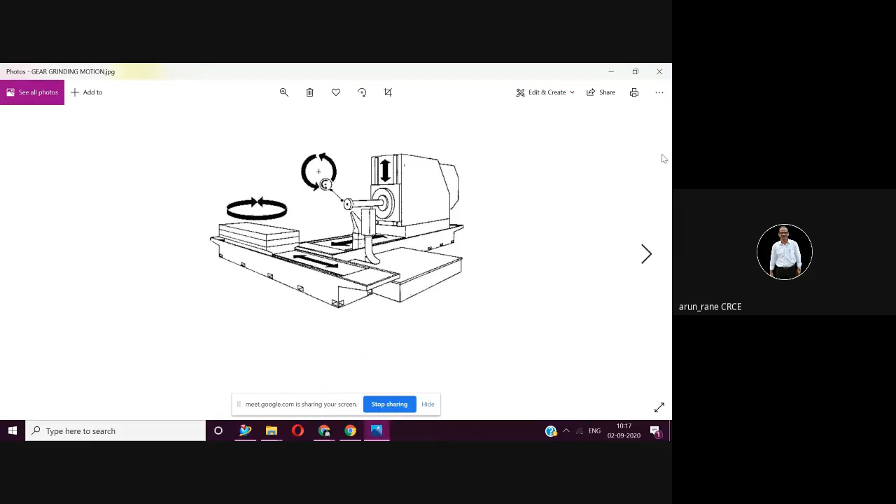This is how gear teeth grinding is done. That is, your grinding wheel is shaped. Grinding wheel is given shape as per the teeth, and the gear teeth are finished.

This is what you can see. This is what is your grinding wheel is, and these are the teeth. Remember, this gear teeth grinding process is used only for finishing and not for teeth manufacturing. So the teeth are manufactured, then as I showed you yesterday, it goes for the hardening, that is heat treatment process, and then they are finished with the help of the grinding.

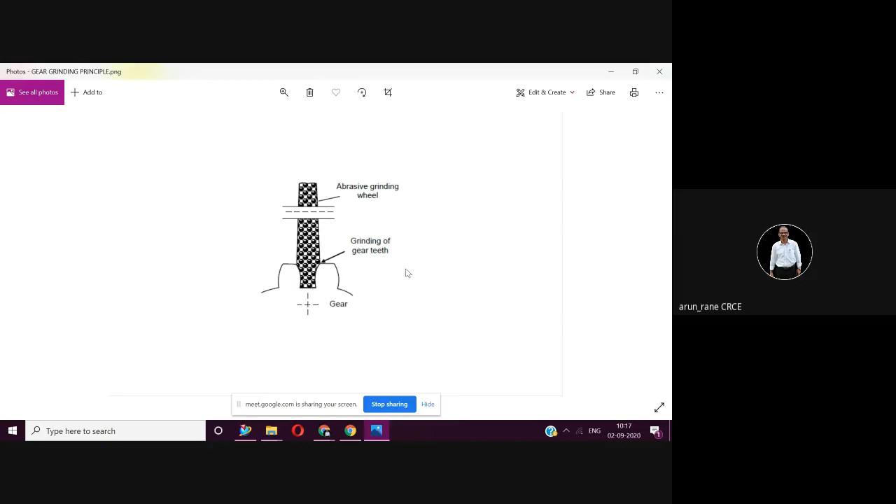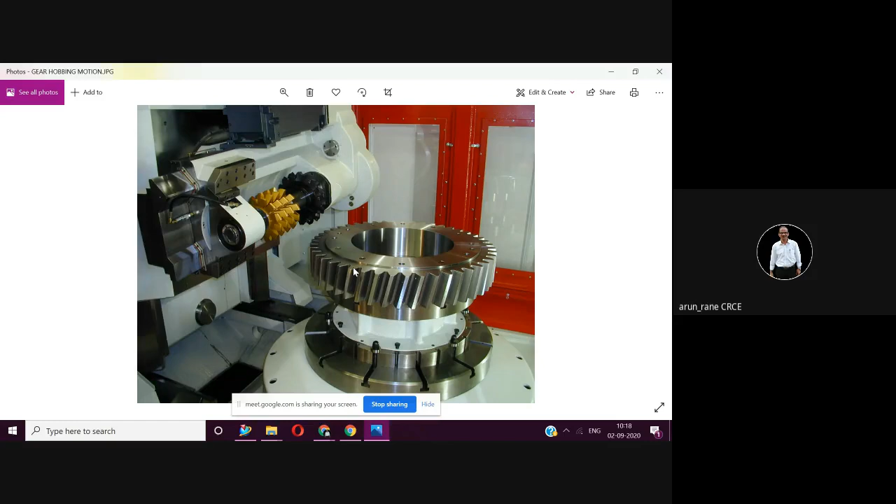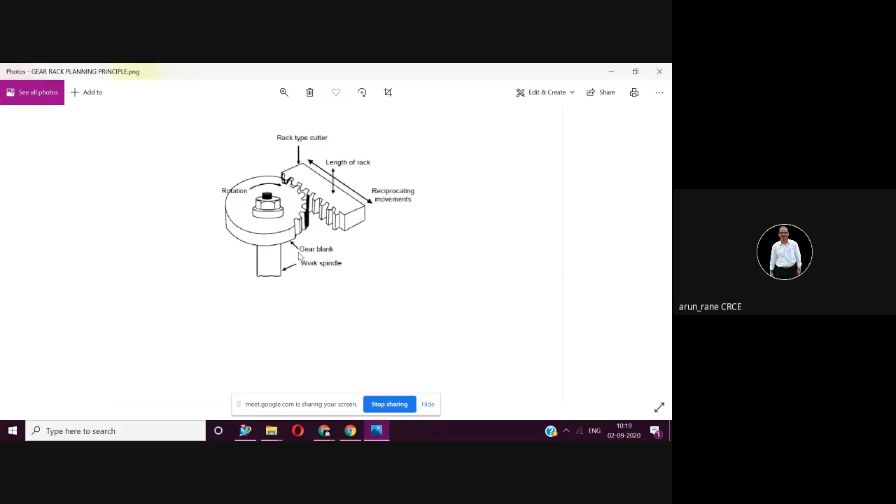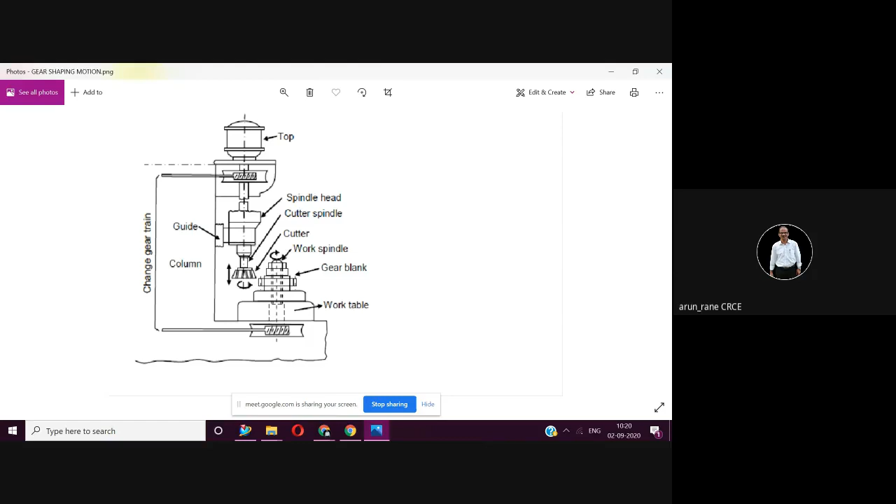Then you can draw one more sketch other than the previous one. This is a gear blank. Now this particular diagram shows the different mechanisms. So you have a gear blank here. Then this is your shaping cutter, which is moving up and down. Then it also rotates. So the gear shaping cutter is rotating, and the feed is given in this direction.

So this is your rotary feed, and this is your radial feed. This radial feed is also called the axial feed, but radial feed is more appropriate because it is penetrating. The depth of cut is given along the radius.

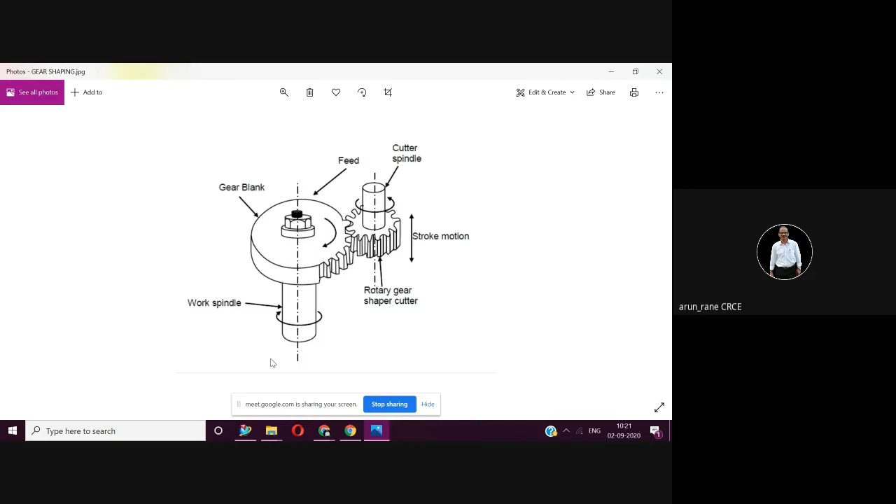Hello, sir. Hello, sir. Hello, sir. So gear comes under the category of... hello sir... multi-point cutting tool. Multi-point cutting tool.

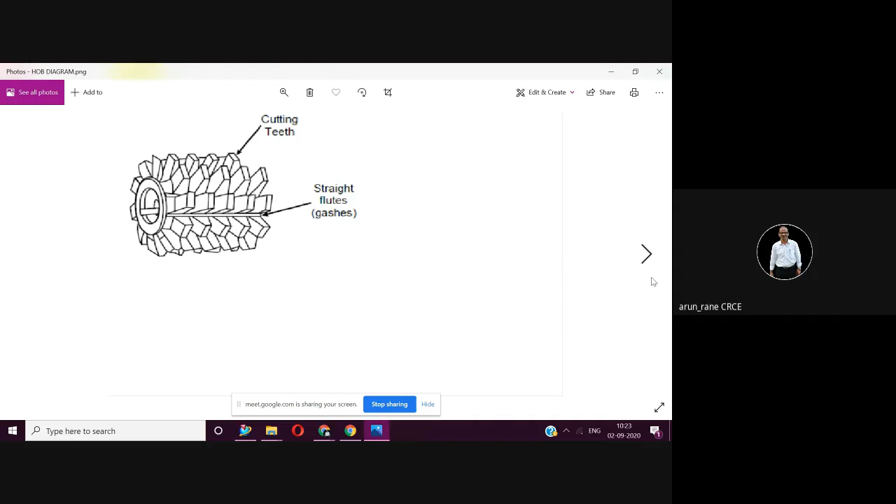Hello sir, Siddhant wants to join the meeting. Please add him. Who join now, Siddhant? Tell you join, no? Yes sir, he is in. At the end, write your attendance in the chat box. Sahil, alright sir. Yeah, I'll continue.

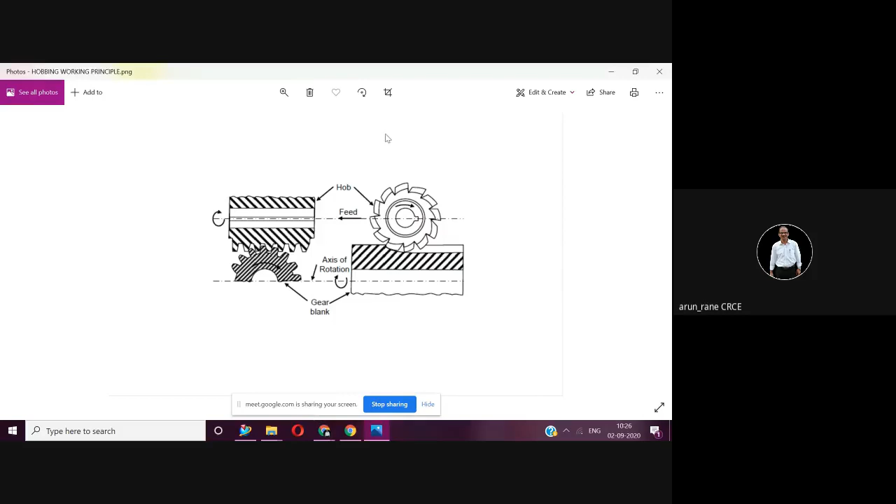Again, this is not important from your examination point of view. We will discuss honing, but that honing process will be for finishing the bore, for finishing the holes. So honing as applied for teeth finishing is not important from examination point of view. You just have to remember the different teeth finishing processes: gear teeth honing, gear teeth lapping, gear teeth grinding, and gear teeth shaving, out of which gear teeth shaving is there in the syllabus.

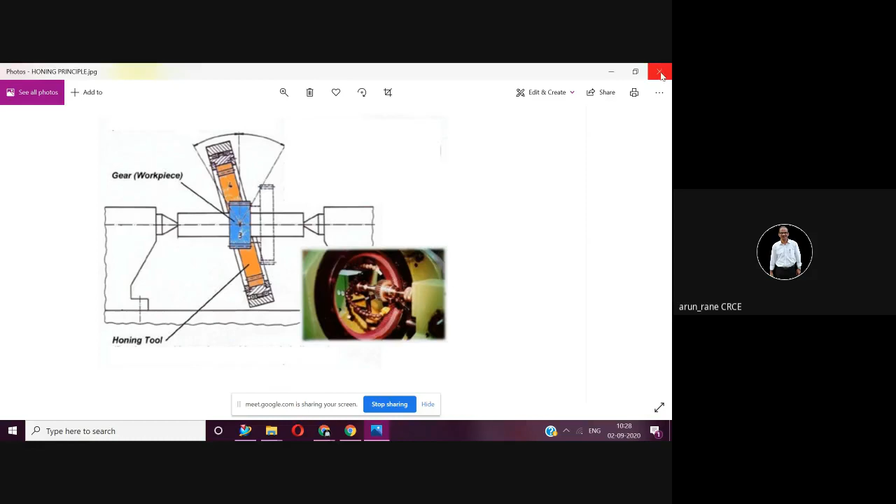Anybody want to ask any doubts? Yes.

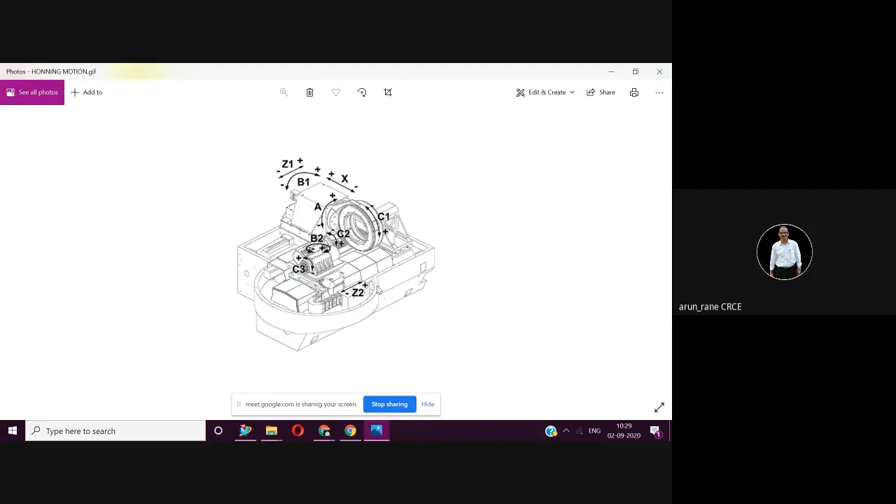But remember, gear teeth grinding, gear teeth honing, gear teeth lapping - these three processes are becoming obsolete, or rather I will say these processes are obsolete, because these are very expensive and time consuming also.

Then how to finish the gear teeth? With a process called shaving, gear teeth shaving. Gear teeth shaving process is used for finishing the gear teeth, which is more economical and faster also. In gear teeth shaving, you have a master gear which is fed against the gear which is to be finished. In just two or three rotations, the teeth are finished. So it is very fast and economical also.

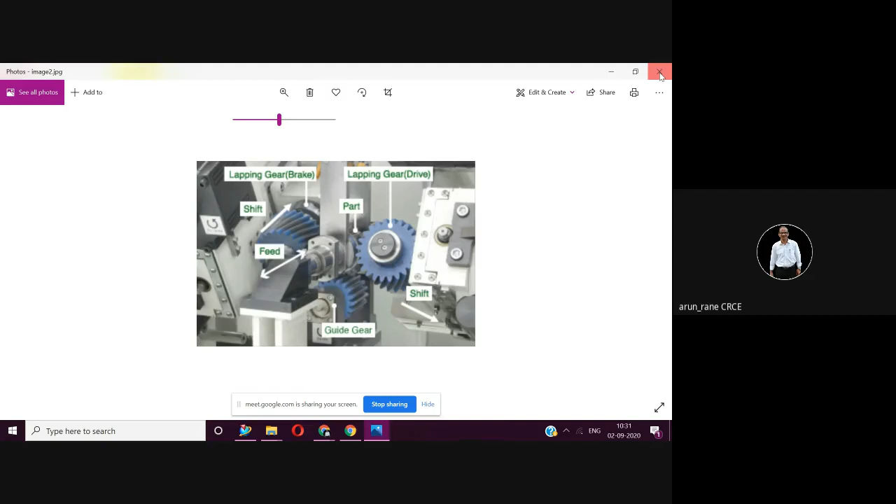Now just look at this carefully and try to identify which kind of gears are these.

So can anybody tell me what kind of gears are these? Can anybody tell me? Helix? Sorry, Sahil. Bevel? Helical type, helical gear, sir?

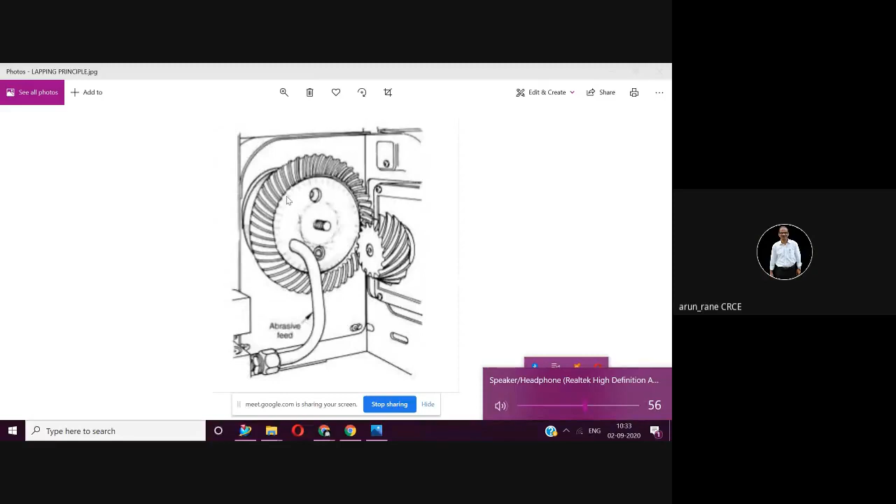This looks like a helical gear, but it is not a helical gear. This is actually like a bevel gear, but it is again not a bevel gear. In bevel gear, the teeth are cut straight. But if you notice, these are curved.

So these are called spiral. This is called the spiral bevel gear. And if you have noticed, the axis of these two gears are not in the same plane.

That is what the beauty of bevel gears is. Bevel gears are used for transmitting the drive between two intersecting shafts, and it need not be at the same center line. The shaft will be intersecting, need not be 90 degree. It can be at 45 degree, it can be at 60 degree. Any angle where your spur gear or helical gears cannot be used, you have to go for bevel gears.

For spur gears, usually the gear center lines are matching. But in bevel gears, they are not in the same plane. See, the center line of this wheel is here, whereas the center line of this is here, isn't it? So there is a difference, they are not in the same plane.

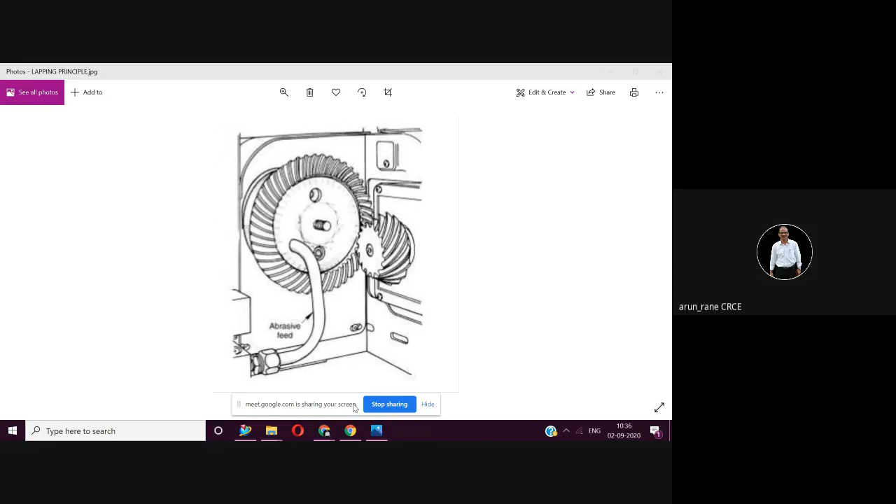Remember, the height of the rear axle and the height of the propeller shaft are not in the same plane. There is a difference between the height, and that's why you need to use this crown wheel and pinion. This crown wheel is cut on the bevel gear generator. Again, not important from examination point of view.

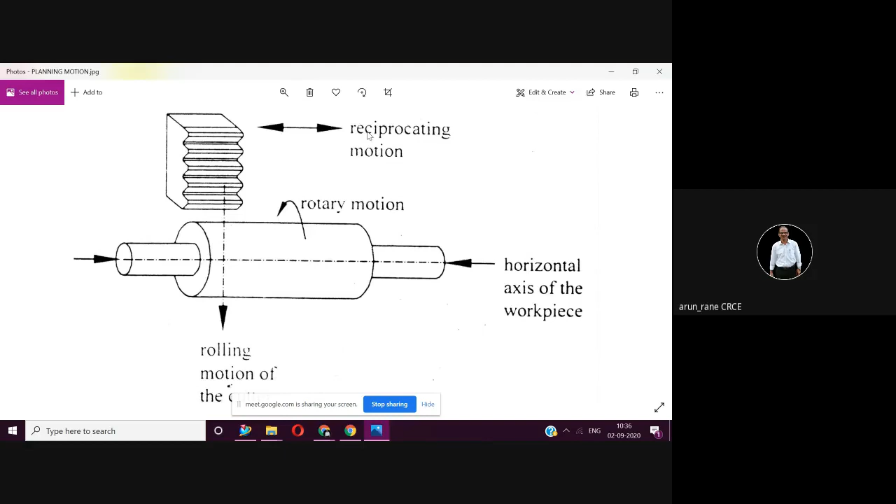This you have already seen. This represents the rack, and this is your workpiece, and the teeth are cut. This is the simple diagram which you can use for answering your questions in the examination.

So the gear blank is not rotated positively, it rotates because of the gear shaving cutter. So it's very simple, the mechanism is very simple. The shaving cutter rotates positively, meaning it is connected to the motor, maybe through some gearbox, reduction. Then it comes down and it is fed inside the gear blank.

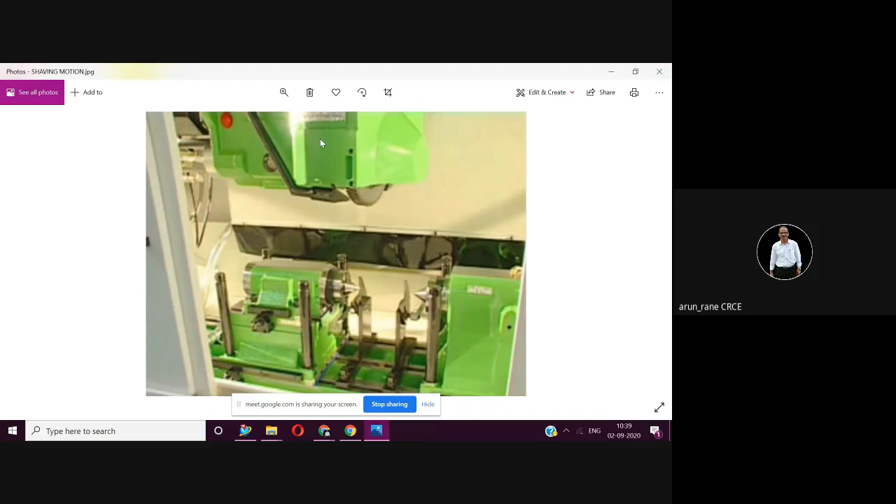This is how the gear shaving cutter will look like. This is your gear shaving cutter. See, remember, I am talking gear shaving and not gear shaping. Don't be confused. Gear shaping is used for cutting the teeth, and gear shaving is used for finishing the teeth. What we are discussing is gear shaving.

We have already discussed gear hobbing and gear shaping. These are used for cutting the teeth on the blank where the teeth are not cut. Whereas gear teeth lapping, gear teeth honing, gear teeth grinding, and gear teeth shaving, these are the teeth finishing processes which are done after the heat treatment. So this is the gear shaving cutter.

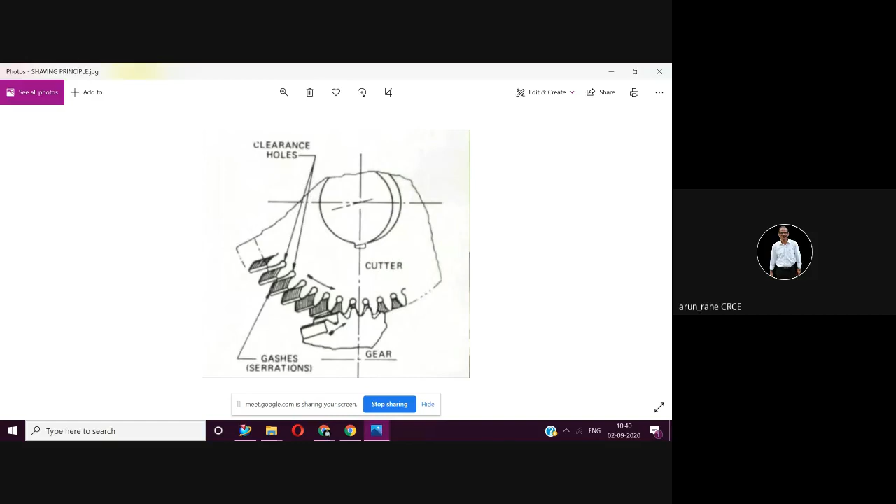This is how the blank is held. Again, sorry, it's not a blank. This is how the workpiece gear is held between the centers, and there is the gear shaving cutter. It is just fed radially inside, and then it is just moved up and down to finish the teeth.

That's all. Very simple. And if we note, this workpiece gear rotates because of the rotation of the gear shaving cutter. So the gear shaving cutter is rotated positively, and because of the gear shaving cutter, the workpiece gear rotates. Whereas in gear hobbing and gear shaping, both the cutter, that is the gear hob and shaping cutter, and the blank rotate positively. This is what you should remember.

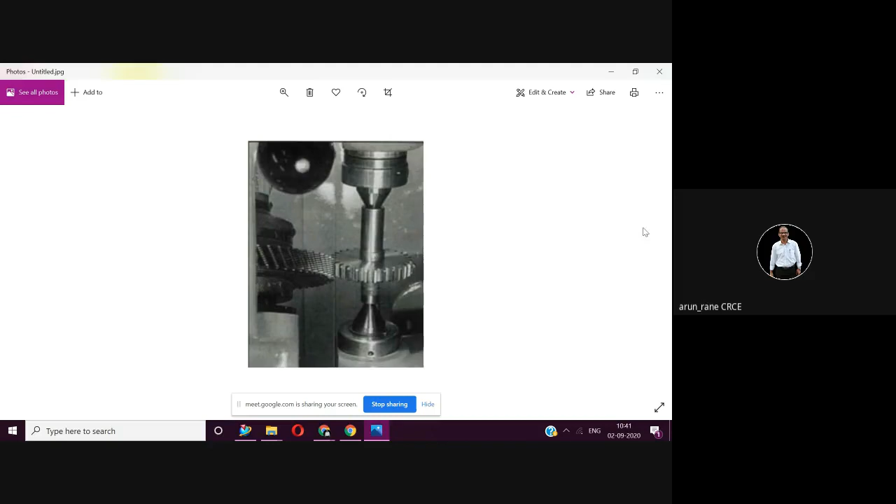Alright, so these were a few images. So I think you now have a fair idea of what is gear teeth hobbing, what is gear teeth shaping, and what are the gear teeth finishing processes. Videos shown. How does this machine look like?

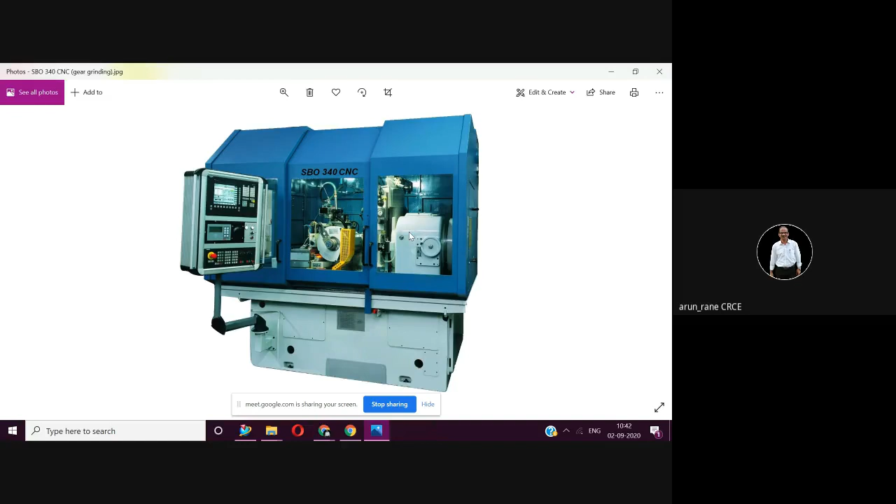We'll just quickly go through. This is not important from the examination point of view. Just to show you how the machine looks. This is what your CNC gear cutting machines are. This is a CNC gear grinding machine. This is SBO 340 CNC; 340 indicates the maximum diameter of the blank which can be mounted. This is your CNC control.

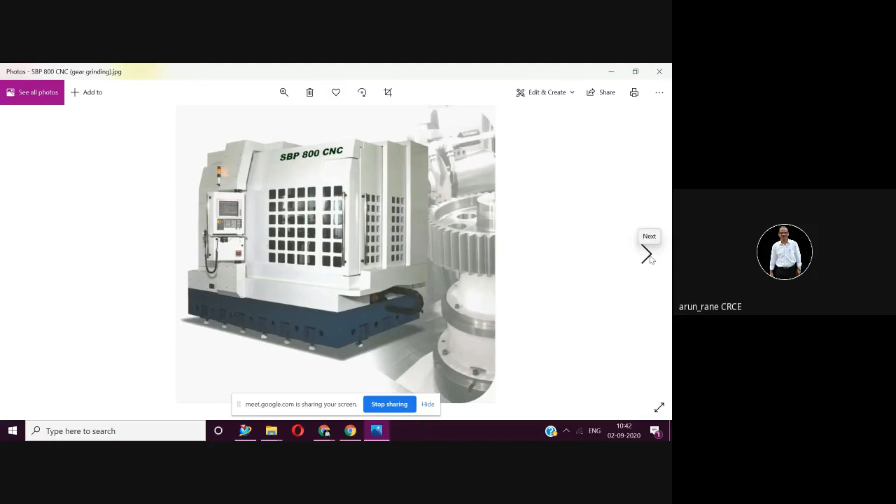This is a CNC grinding machine. But nowadays it is becoming obsolete. Only institutes like TIFR, that is Tata Institute of Fundamental Research, or BARC, that is Bhabha Atomic Research Center, have this. Even IITs don't have this CNC grinding machine. BARC and TIFR have it just for research projects. It's not meant for commercial use, because they are not profit making institutes. It's funded by the government.

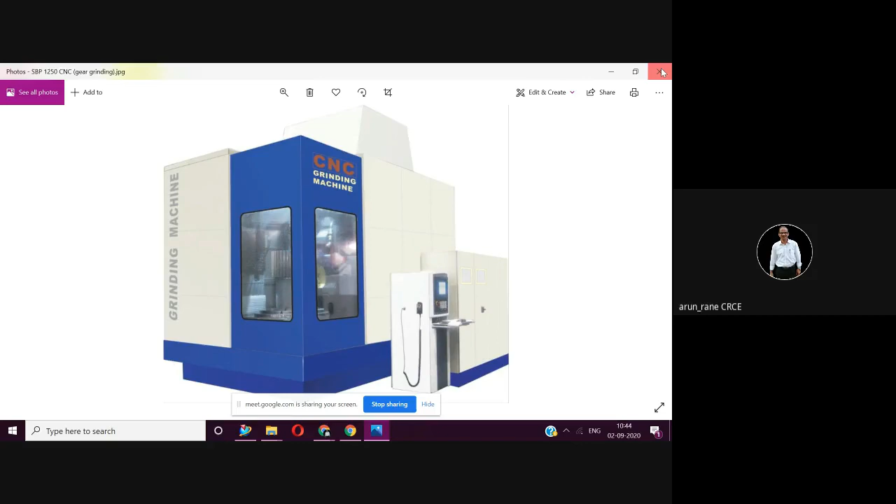But suppose you want to become an entrepreneur, you can't think of a CNC grinding machine now, because the cost of the CNC grinding machine will be huge, and everybody goes for gear shaving. Everybody goes for the gear shaving machine nowadays. So these were some pics of the machines.

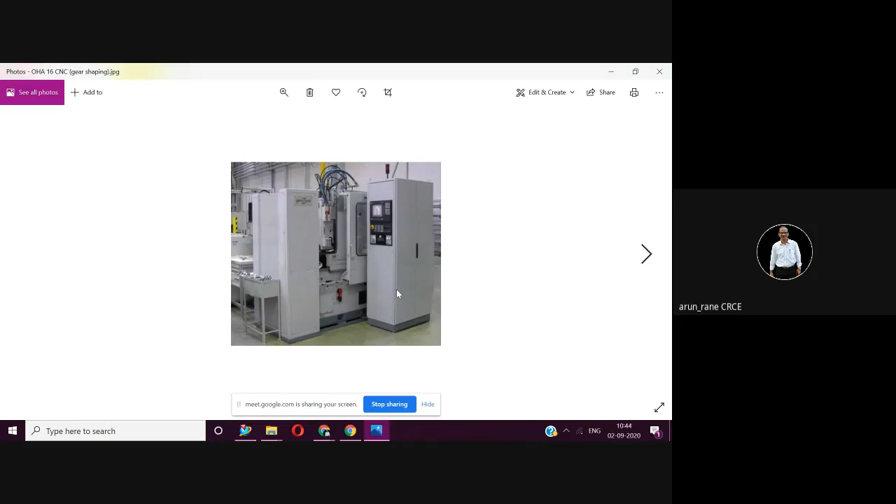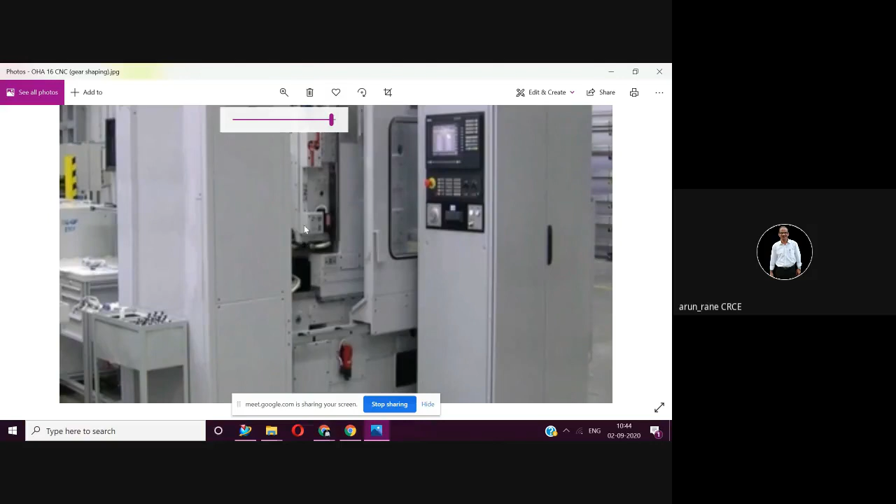These I have shown, the different... this is a gear shaping machine. Let me zoom it. The cutter is mounted here. The workpiece is here. The gear shaping cutter rotates and it moves up and down, that is, it reciprocates, and the teeth are cut. Now gear hobbing machines as well as gear shaping machines are CNCs.

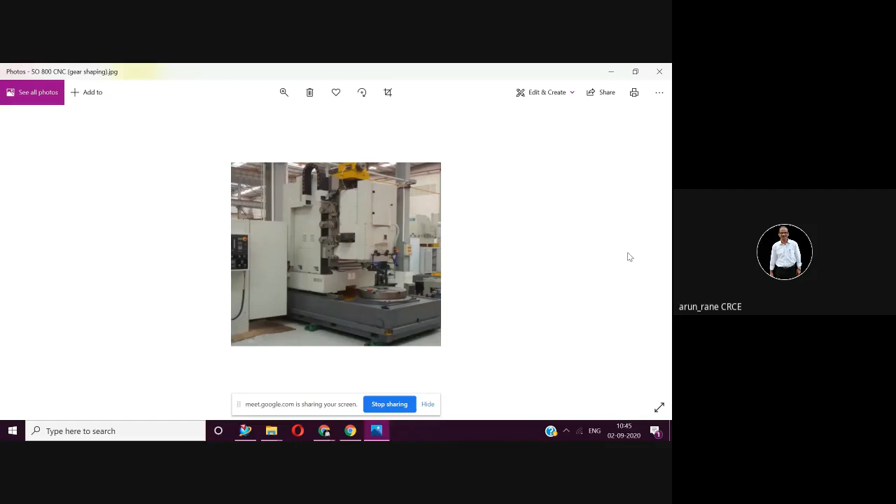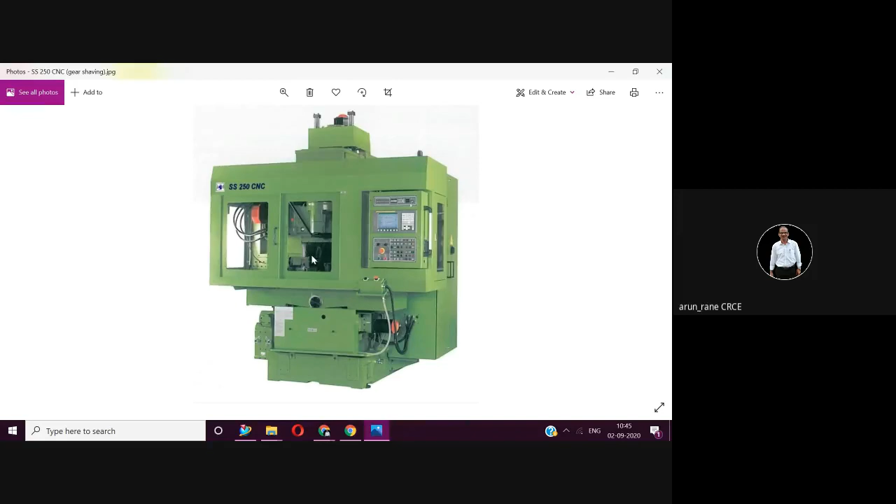Another gear, I think it is the same one. Same pics. I'll just quickly go through another model. This is your gear shaving model. Again and again, I am telling that gear shaving is commonly used because it is fast and economical. This is how your gear shaving machine will look.

Mostly, these gear cutting machines and gear shaving machines are CNC. They are either 2 axis or maximum 3 axis, unless you want to cut spiral bevel gears. That spiral bevel gear generator is very complex, and those machines are manufactured only by the company called Gleason, Swiss machines.

They're very complex and very costly also. Yes, all automobile manufacturing companies like, say, Mahindra, who manufacture gears on their own. If you visit Mahindra, their gear cutting shop, you can see these bevel gear generators or spiral bevel gear generators. They have the shops, it's a separate shop. Not only, I mean, no gear shop. I'm not talking about gear shop.

See, they have a gear shop. In the gear shop again, they have a section for spur gear, section for helical gear, section for straight bevel gear, section for spiral bevel gear, and section for gear teeth finishing processes. Like that it is. So they are specialized. This kind of specialization you will not find. Even there are some small scale companies who are manufacturing only gears. They don't have a setup like this.

But such kind of setups can be afforded by companies like Mahindra, who are the giants in automobiles, or Tata, that is Telco. If you visit Telco, you can see all these machines. That is the advantage of doing internship in big companies, that you get exposure to technology. Yes, there are advantages and disadvantages also, because you don't get a project to work upon in big companies. They don't have time. But if you keep your eyes open, nobody stops you from learning.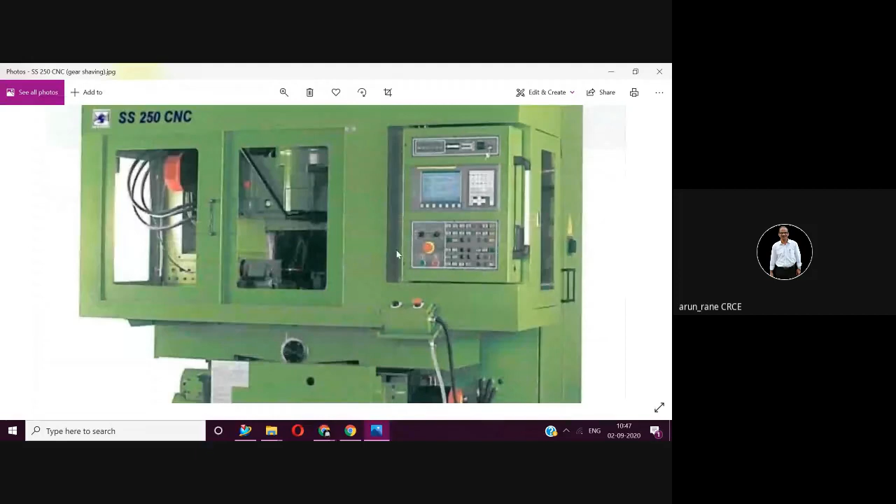They give you assignments and projects, and unless you do assignments or work on projects, you don't learn, unless you have very good observation power. Then only you learn. Otherwise, it just becomes a time pass. So this is what I was talking about.

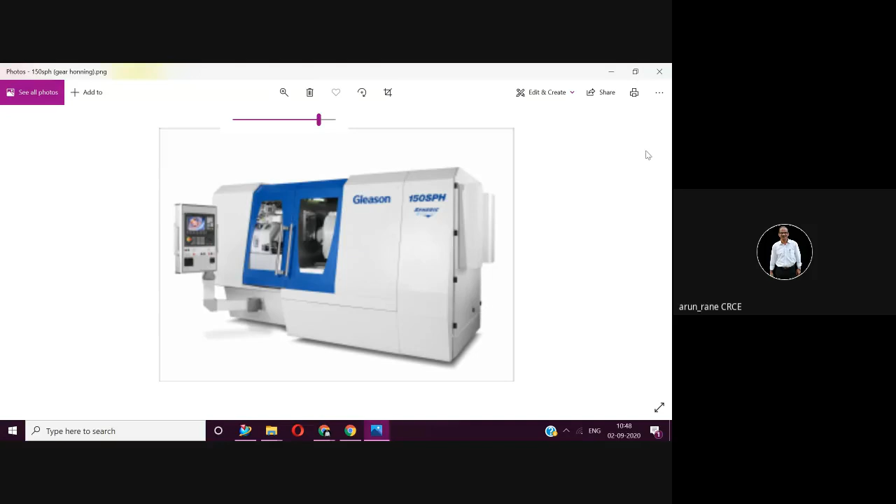Gleason, Gleason machine, who are specialists in bevel gear generators. Specialist in bevel gear generators. This is what is your gear teeth honing. Very complex. Now some videos. I'll quickly go through some videos. This gear shaving video I'll show you. Gear shaving video.

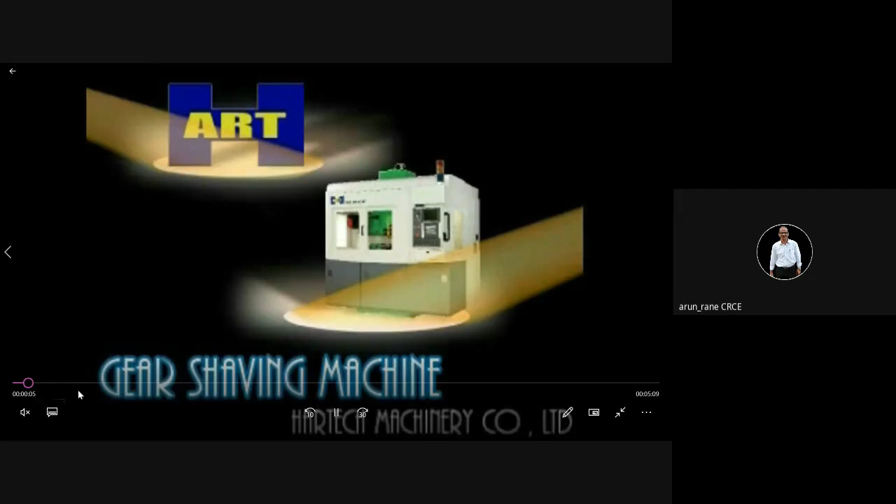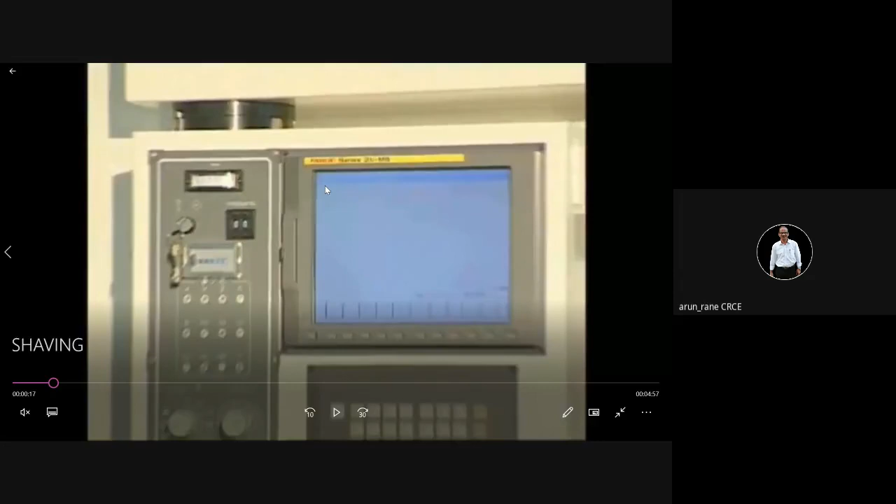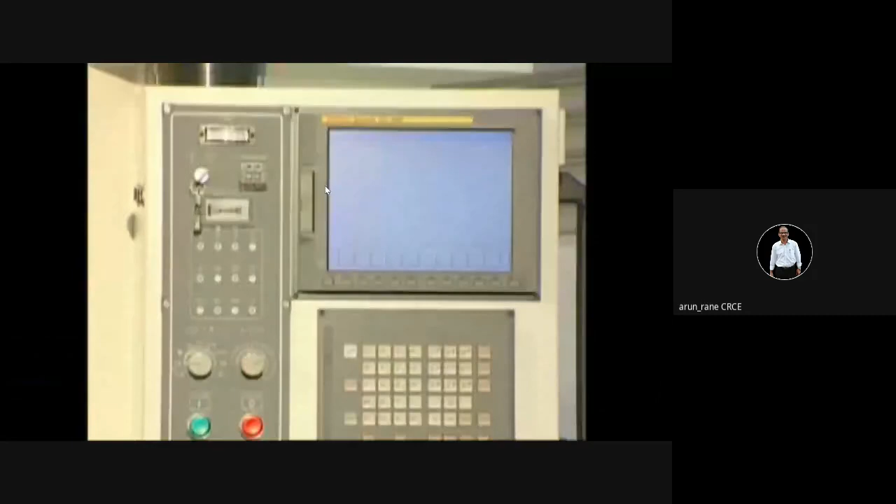Fanuc is the reputed control, CNC control. Fanuc has its footprint in all the areas. You talk about CNC turning, you talk about CNC milling. Everywhere they have developed the technology.

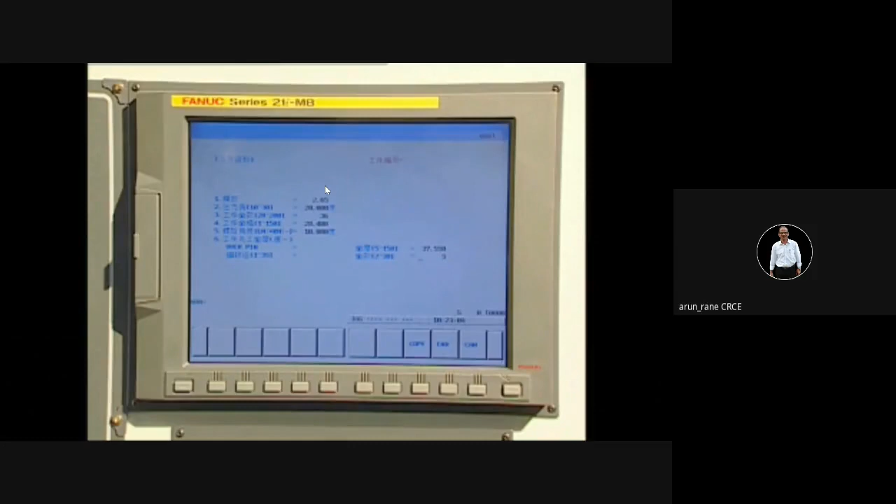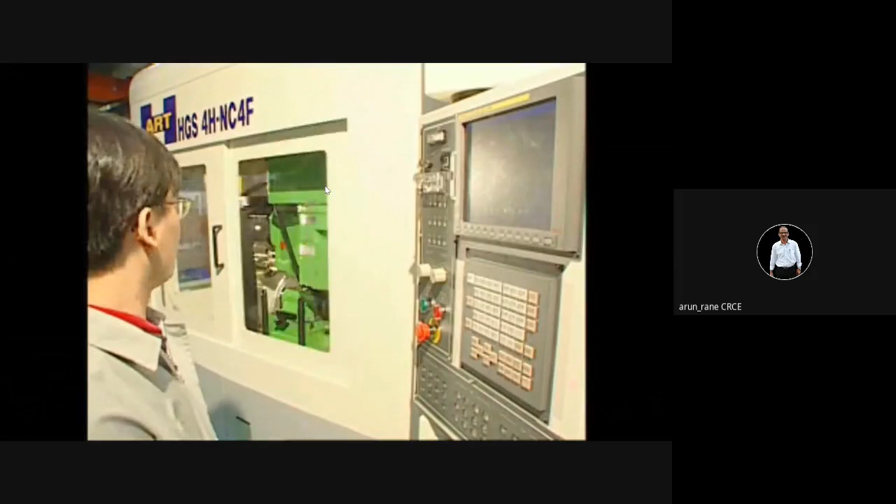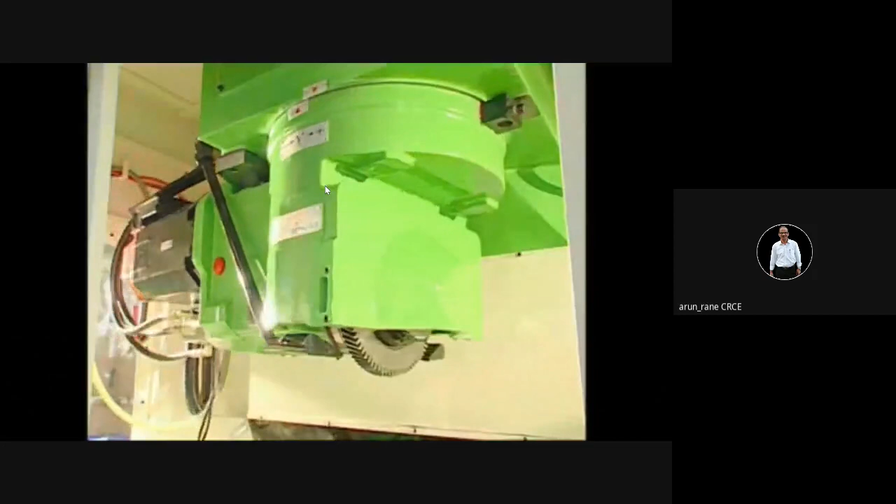Fanuc, if you visit their plant in Japan, you will see the uniform, yellow uniform. Everybody has been given a yellow uniform. Right from the top management to the sweeper, everybody has to wear the uniform so that there is no differentiation. So that's an integrity kind of thing. So that helps to improve the teamwork. Even in the canteen also there is no differentiation.

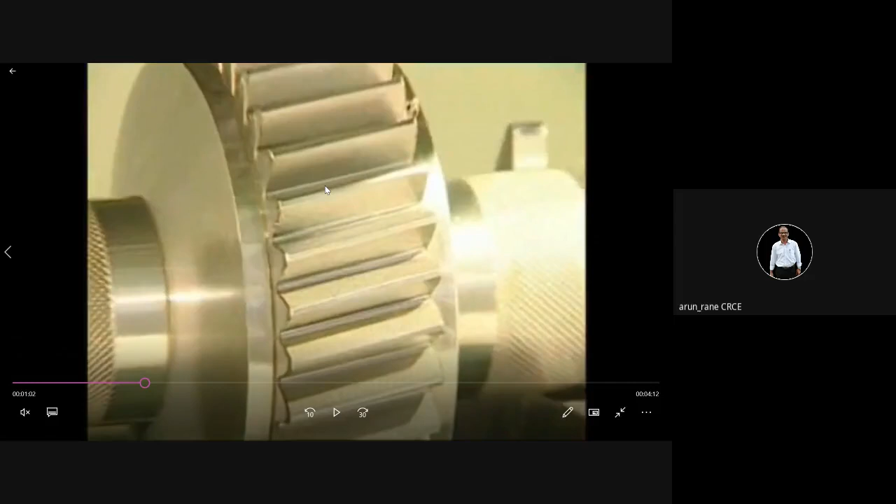Like in our companies, I'll just hold it. In most of our companies, there's a separate canteen for workers, a separate canteen for supervisors and managers, and a separate canteen for presidents. So that kind of differentiation is not there.

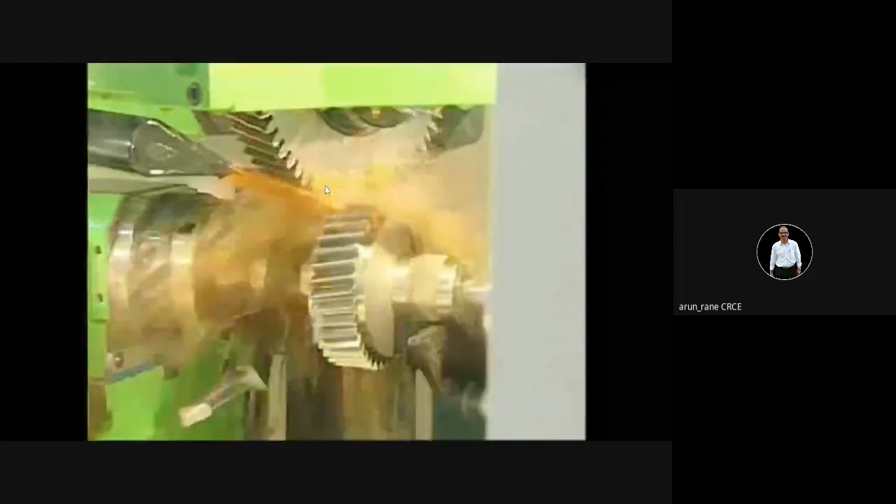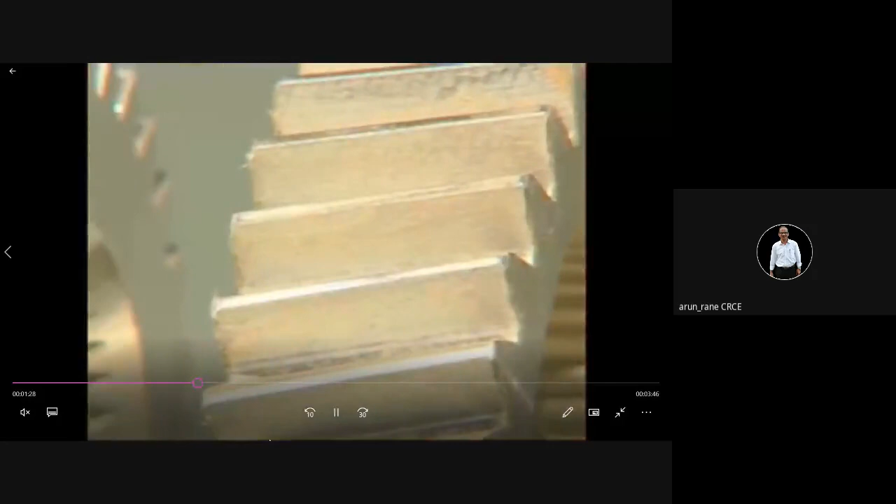So this is now the gear shaving process. As you see, this is what is your gear shaving cutter. Now we have not mixed it with water, so we are only using the oil, soluble oil. You can mix it with water. There is some proportion given, 1:5 or 1:10. This will not.

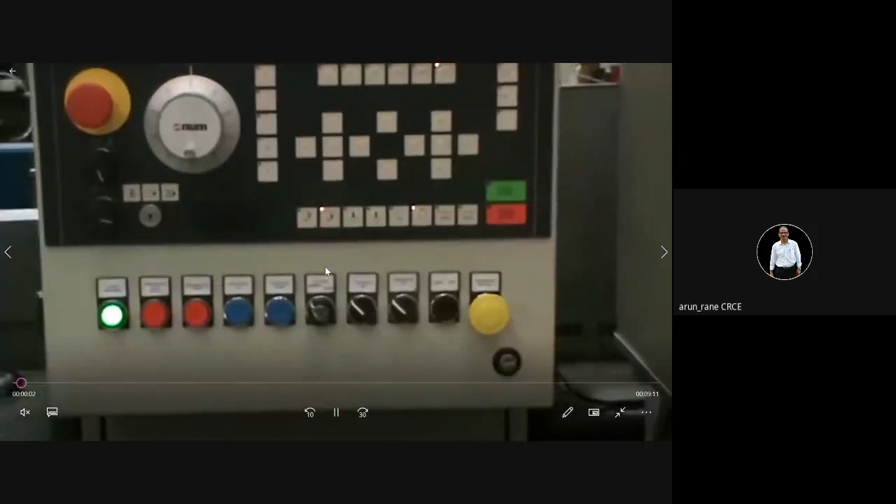Then this is a CNC gear hobbing machine. Pfauter, that is a German make. Pfauter machines are very popular. Pfauter. So Pfauter, they have their own controls, CNC controls. So they have their machine tool as well as their own controls. See, this is what is called a blank.

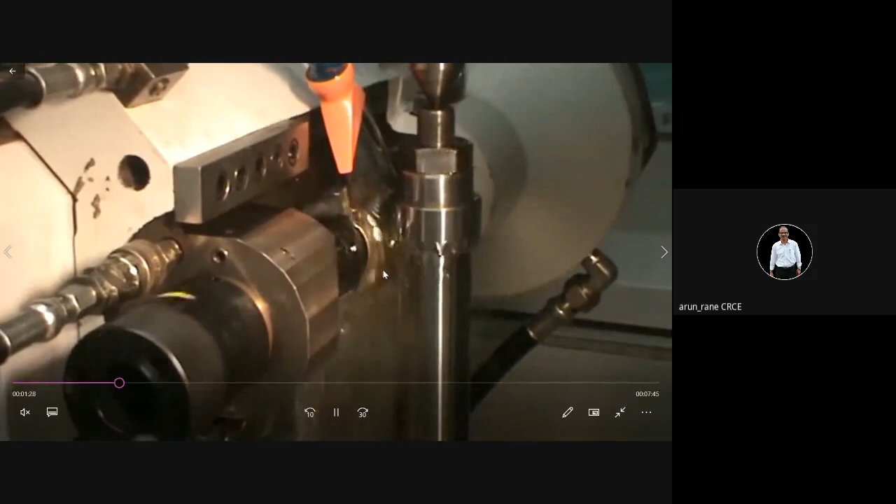Remember, this receives its drive through linkages and through some mechanisms, and the workpiece also receives drive through linkages and through mechanisms. Whereas in gear shaving, only the shaving cutter is rotated positively, which is not so in gear hobbing as well as in gear shaping.

See, now the gear hobbing cutter is being moved from bottom to top, that is from down to up. I'll just take it a little forward. In this particular cutting, the full depth is taken. Full depth is taken.

This is called a mandrel. This is what you see here, this arrow. This is called the mandrel. So you have a center here. So the workpiece is mounted on a mandrel, and the mandrel is fixed between the centers.

You can have two or three blanks on the mandrel, sometimes even four also. So your production is four times. Here you have to take care that the cutter doesn't cut this nut. See, this is a blank on which there is a bush on which there is a nut which is used for clamping the gear.

Yeah. In just one, this is a single depth of cut. In just one depth of cut, the gear teeth are finished. Gear teeth can be manufactured by milling, but milling is a very slow process. This is the Manek gear hobbing machine. This is an Indian machine, Manek brand.

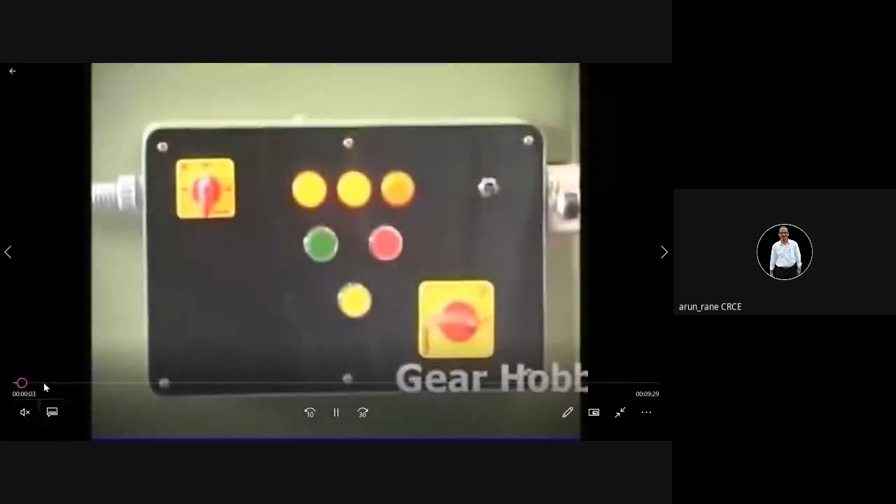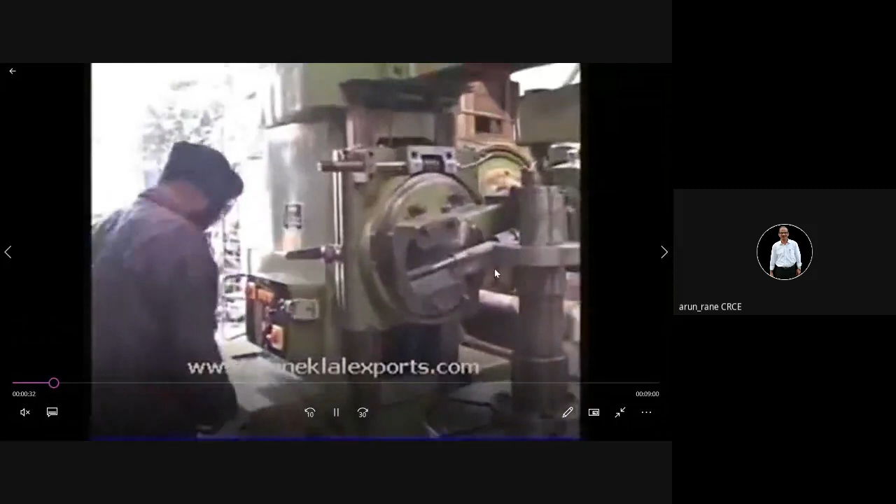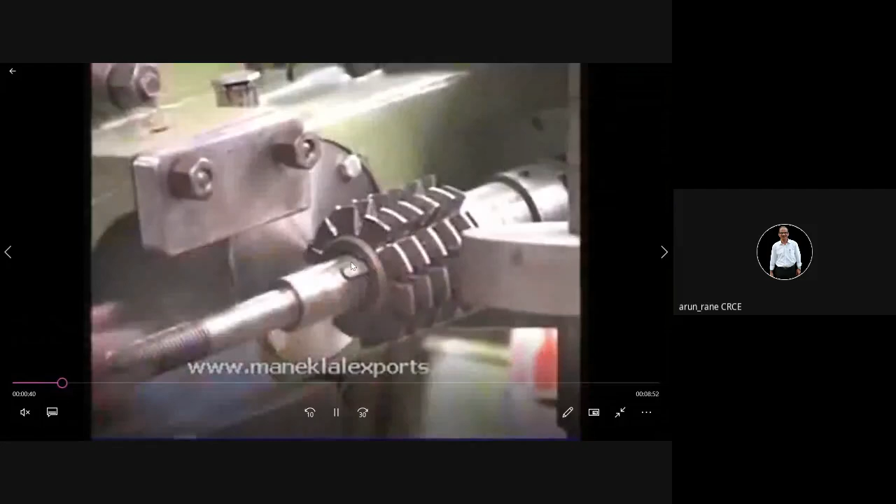This is a blank. This is how your gear hob is put. This is your gear hob. See, this is a key. These are the bushes. This is called the arbor, machine arbor. This is your gear blank, which is mounted between centers. Then you have used a nut for locking.

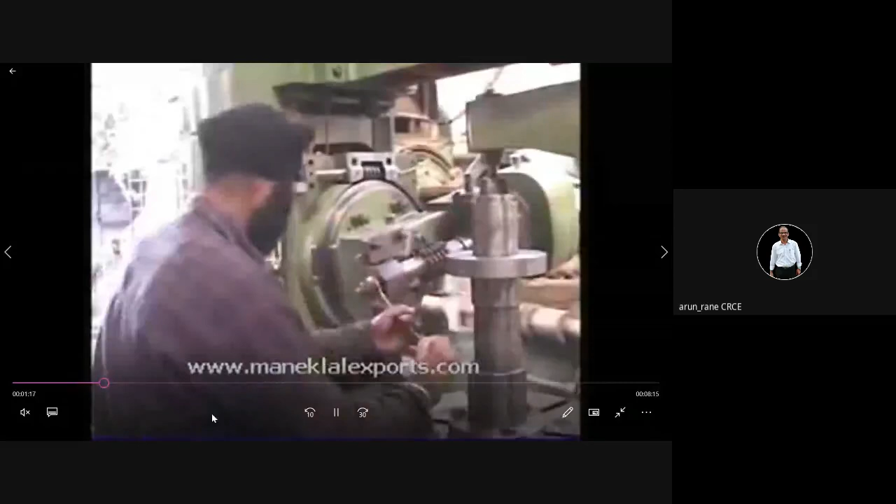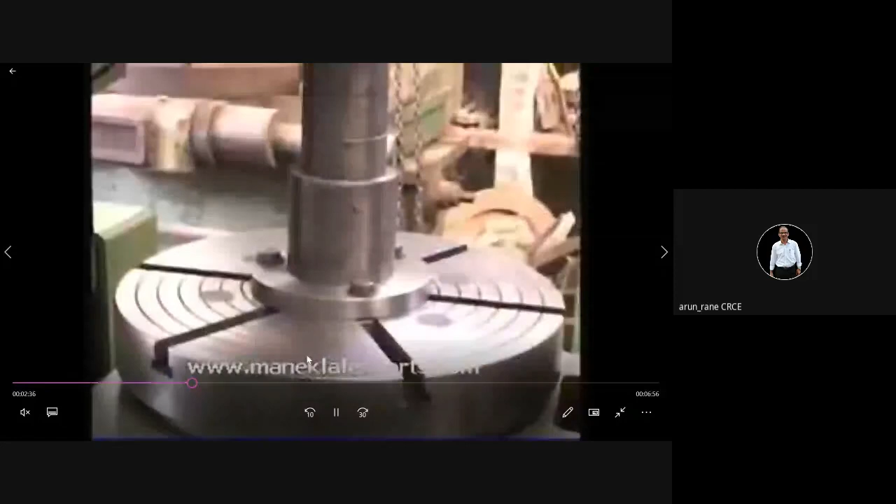Now the hob is fixed. This is the setting part. The hob is rotating as well as the blank is also rotating. These are the different mechanisms I was talking about, which transmit the drive to the gear hob as well as to the workpiece.

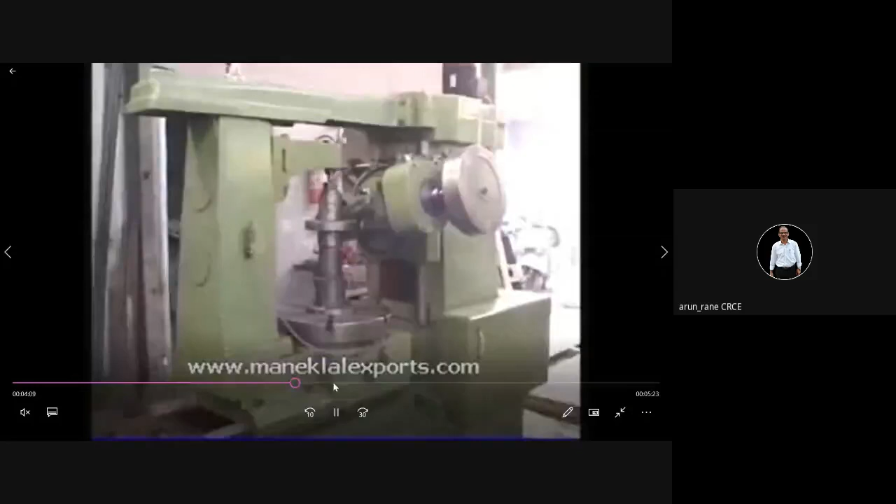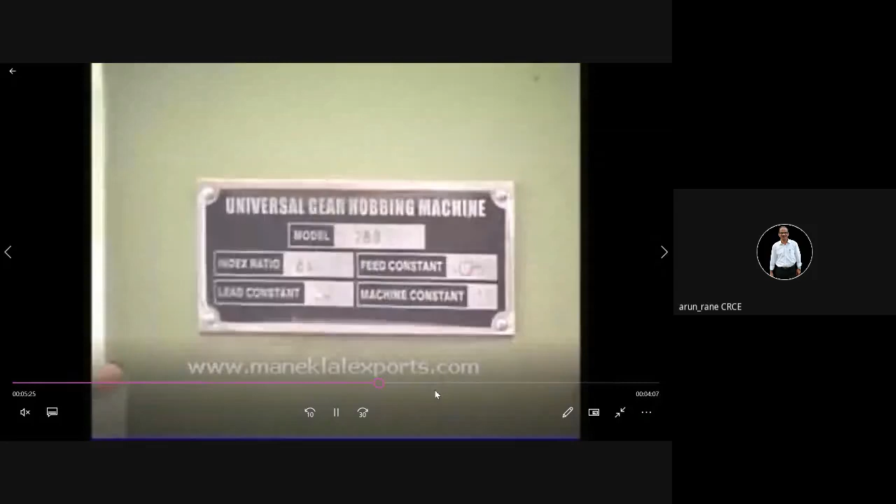So the hob will traverse either from top down or from down to up. Now here the hob is moving from up to down, that is from top to bottom. Again, full depth is given here. This is your helical gear. So in just one go, the gear is finished.